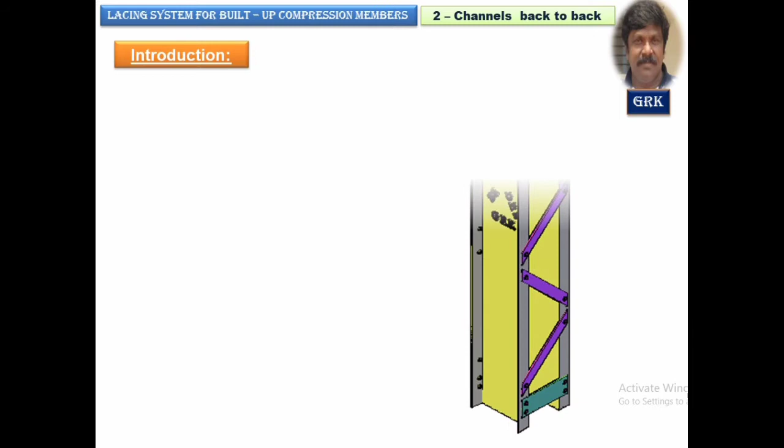Already in the previous video you have seen the design of two I sections joined together by a single lacing system. Now in this session let us study about how to design the single lacing system for the channels placed back to back as shown here.

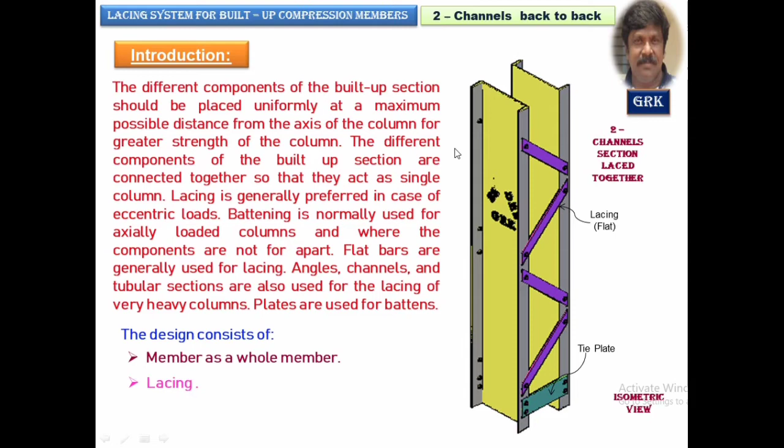The lacing systems will be generally provided for eccentric loading system, whereas the battens will be provided for the axially loaded columns. Now in this session let us try to understand and design the different components like the members, this built up members as a whole, the lacing flats and the joints.

Here the joints have been designed with bolts of different grades. In the next video let us try to learn the same two channels placed back to back with the welding system for the same single lace system. Let us go with the welding. Let us study that in the next coming video.

Now in this section we are going to design the lacings in the form of flats. In the coming sessions or videos you can observe how to design the angles and channels as a lacing system. Let us learn that in the forthcoming videos.

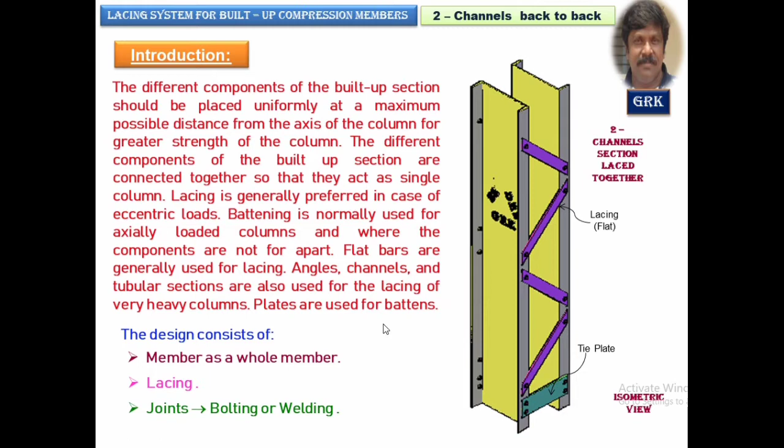Let me take a typical example to design the channels placed back to back. We can also learn about channels face to face or toe to toe. Channels face to face can also be called as channels toe to toe.

Now in this problem we have got two channels placed back to back to carry a factored load of 1300 kilonewton, which has got an actual height of 7 meters and has been effectively held in position at both the ends but not restrained against rotation. The meaning of this is it is hinged at both the ends.

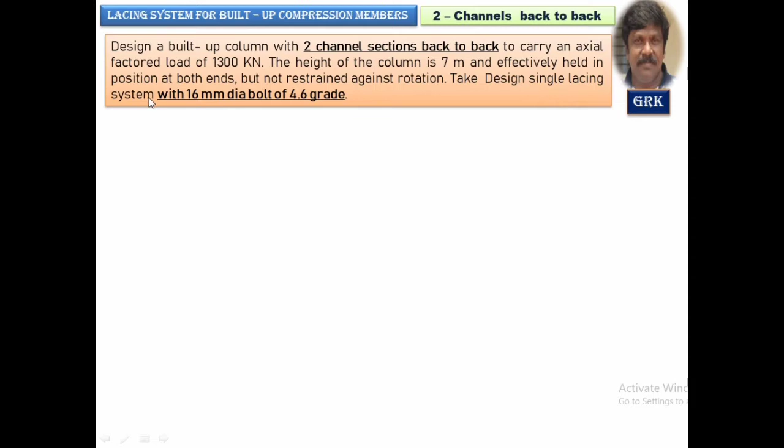Let us try to take out the effective length formula from the code and learn about that. And we have to go with a single lacing system with a 16 mm dia 4.6 grade bolts.

So let me take the I section. I just place it like this back to back. We want to find out the suitable spacing for this, and all the spacing, everything will be designed based on the condition that we have to design with an economical section that can be obtained only when I take up the RZZ value which is running perpendicular to this web and parallel to the flats lacing.

That one should have a minimum radius of gyration or less radius of gyration than about YY axis. That is what the code specifies. We have to purely stick on to that and see how to design.

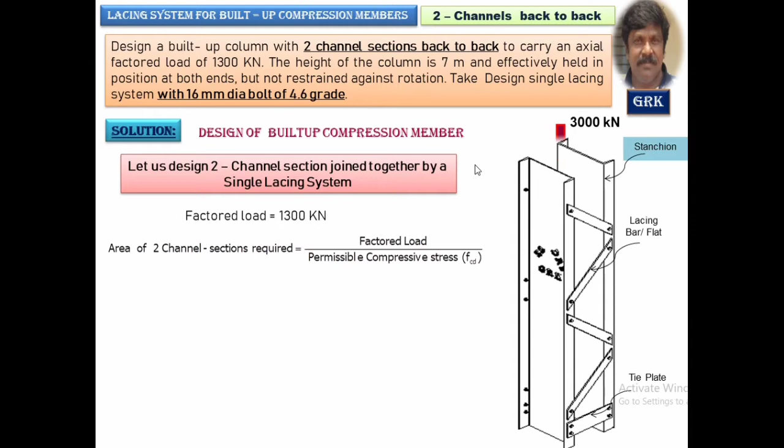I will speak about all these things in a separate video where the complete procedures we are going to talk about for the different conditions. You can look into that video and learn more about the theoretical aspects of these problems, how to solve the problems.

Now you got the area of the two channels that is required to be found out by using the formula factored load divided by permissible compressive stress. The compressive stress could be assumed between 125 Newton per millimeter square to 200 Newton per millimeter square, approximate range.

From 0.4 times of Fy to 0.7 or 0.8 times of Fy value. The lambda value you can assume like that and get the stress, or assume the stress itself and solve the problem. I can assume anything between this and try to solve the problem.

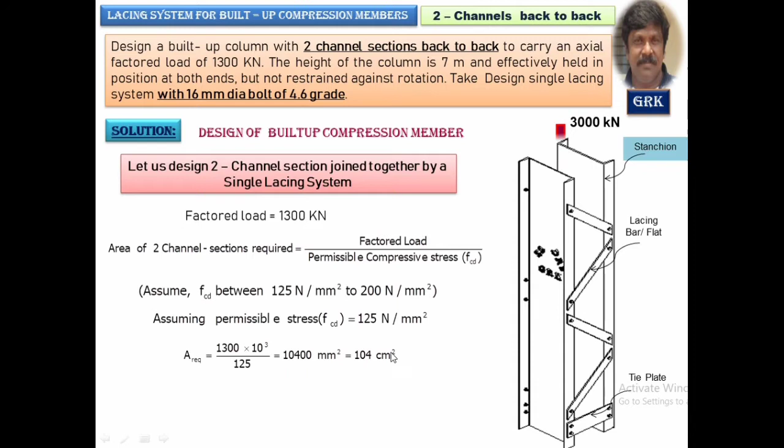Now in this case I have taken the permissible stress as 125 Newton per millimeter square. The area required is 104 centimeter square, and we will read in terms of centimeter square because in the code IS SP 6 part 1 or referring the steel table we have to look into the centimeter square. So we are going to convert the millimeter square to centimeter square. So the condition lies here for the lacing.

As I explained earlier, the maximum radius of gyration RYY should be greater than RZZ. RZZ is nothing but the axis which passes parallel to the lacing system. So this is the layer the lacing has been done to the flanges of the channel. Now this is the ZZ axis parallel to that. That means RZZ should be less than RYY, should be less than or equal, you can say.

And the moment of inertia about ZZ axis and YY axis should be approximately equal. That is another condition to be satisfied, and based on that we are going to find out the spacing between these from the steel table itself or from the code book.

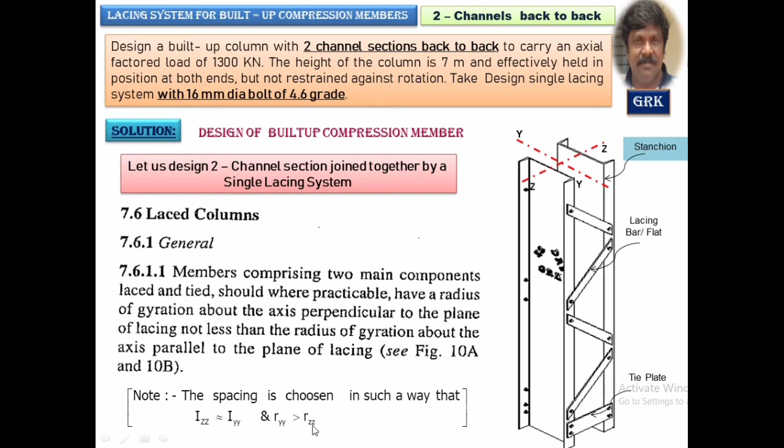It has to be chosen from the steel table based on this condition: IZZ should be less than or equal to, nearly equal to IYY, and RYY greater than RZZ. That is how you have to select from the table.

Now we will take out the table mentioned in the steel table, where the two channels are joined together either by lacing system or by batten system. For the area that was required, we refer approximately 15 to 20% more, and the area I am going to refer is 107.32 centimeters square.

Now I am going to look into the spacing in such a way that the moment of inertia about ZZ axis is approximately equal to moment of inertia about YY axis. These values are approximately equal, and at the same time the radius of gyration about ZZ should be less than the radius of gyration about YY axis. This is how we are going to select the member.

So the selection of the member is ISMC 350, and the spacing for this is correspondingly equal to 220 mm. The distance between the channels back to back, or from web to web, we can call it 220 mm. We can try this, or otherwise there is another way of calculating it.

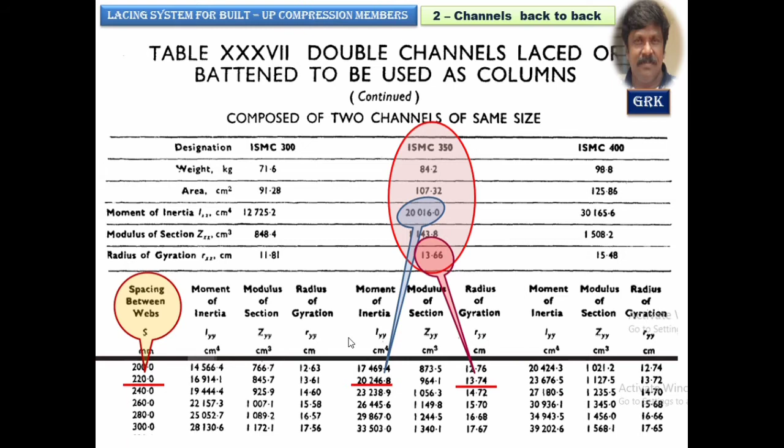We can calculate from the knowledge we got in the first semester of engineering, from the moment of inertia chapter. We can do it like that, or get it from the table itself directly. Any method could be adopted for selection of the section.

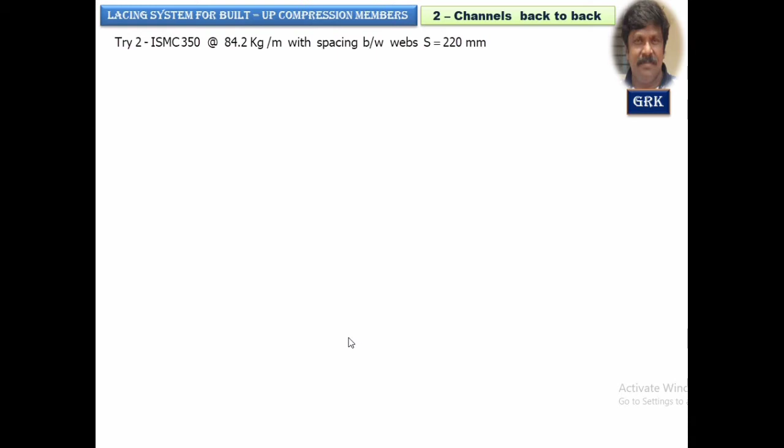Now we are going to try this section of ISMC 350 at 220 mm center to center. Let us write down the section properties whatever we have got. The area we have taken, the RZZ value I have noted from the table we referred. I could have written the value of IZZ and IYY, but since we are not using them anywhere, I have not written it here. If you want, you can write that also.

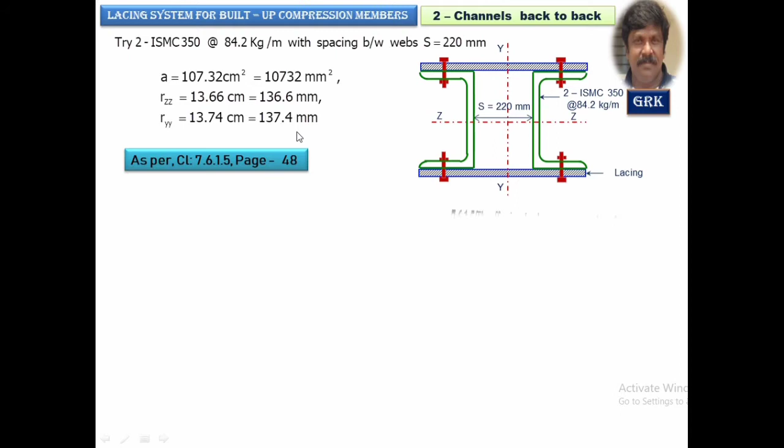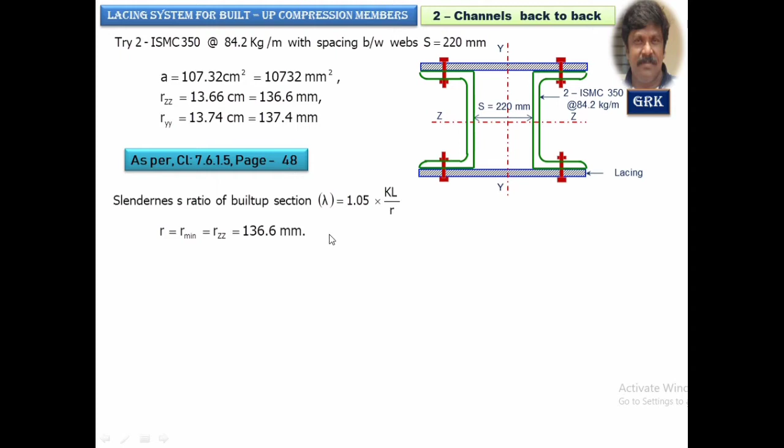Now as per page 48 of the code IS 800, the slenderness ratio has to be taken from clause 7.6.1.5 as 1.05 times KL by R minimum. So R minimum is the minimum value of RZZ, and KL is the effective length.

Effective length can be obtained from table 11 of the IS code 800 2007, where the condition given is that both ends are restrained and free at the other for rotation, meaning it is hinged at both ends. For the hinge condition, the effective length is taken as 1 times the actual length.

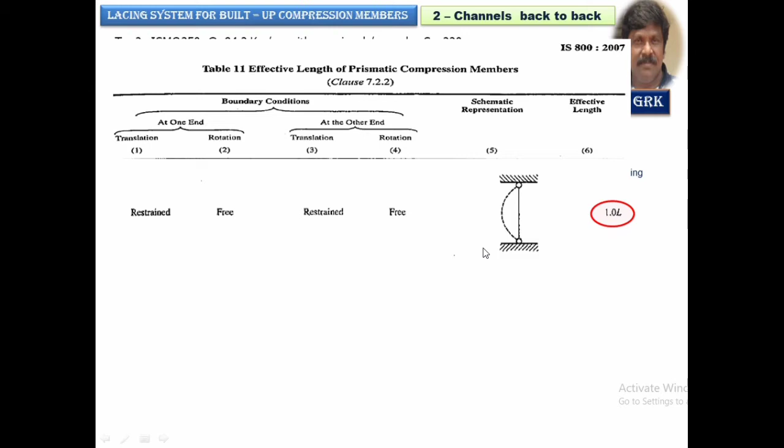So whatever the actual length given, that is 7 meters, the same 7 meters will be taken as the effective length. This is how we can write it: both ends are hinged.

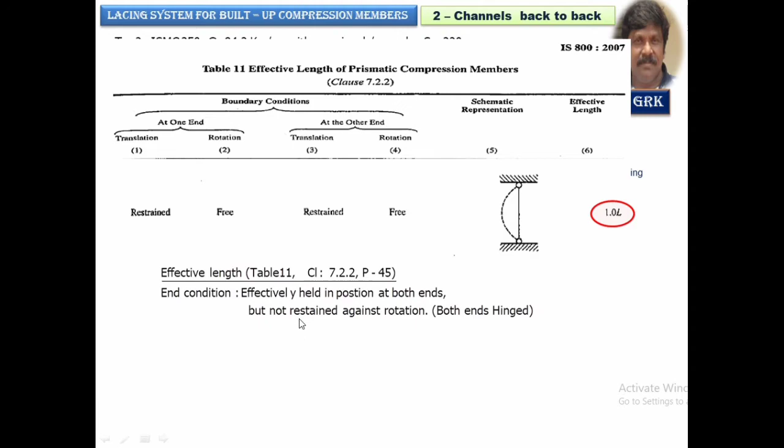Now I got the effective length. Get the slenderness ratio lambda of the built up section. The lambda of the built up section is 53.81 with respect to the ZZ axis.

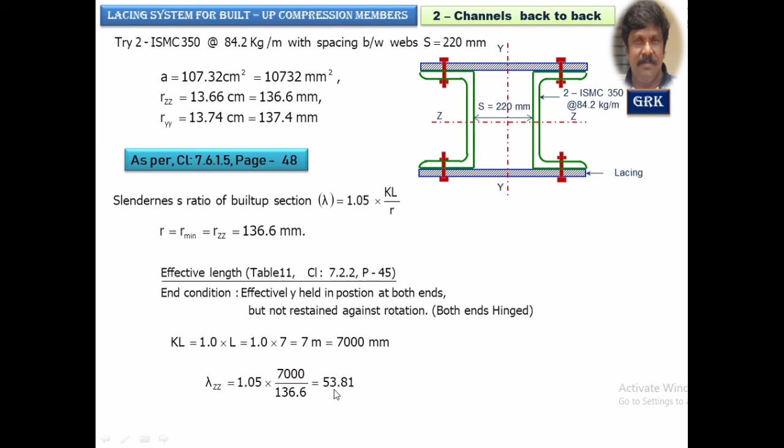So for this lambda value, you have to get the compressive stress from the table, and from page 44 table 10 we can get the buckling class of the built up section.

For any built up member, here only I sections have been shown, doesn't mean that all sections should be given, we have to look into this built up member. So built up members of any type, channels either back to back or face to face, or with I sections or angle sections, you are going to look into buckling class C.

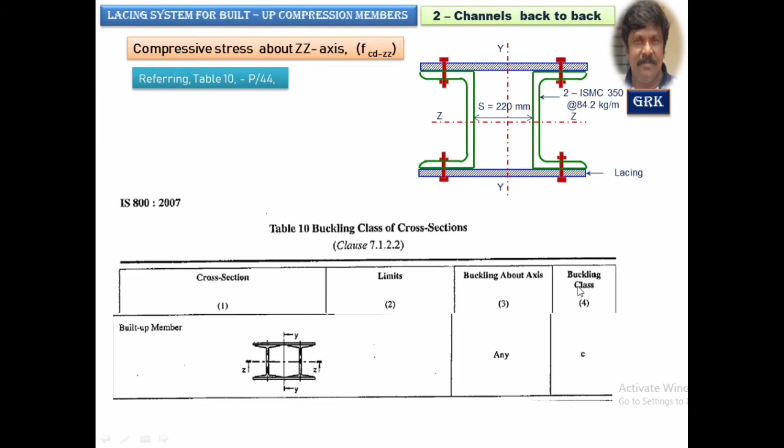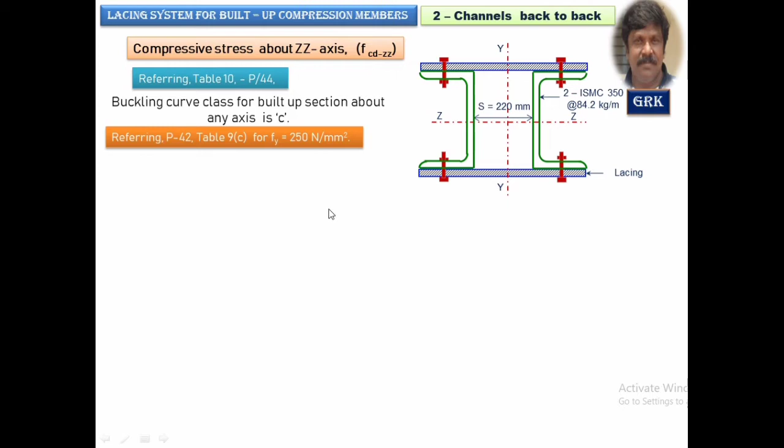So the compressive stress you are going to refer is from page number 42 of the code, where it's given for buckling class C. From table 9(c) you can get the value of FCD. Let us have a look at the table.

This is an extract I have taken from the IS 800 code. Now we got around 53 point something as the lambda value. It lies between 50 and 60 here. KL by R is nothing but the lambda value, lambda ZZ. This is the FCD value. We are going to refer it for yield stress of 250 Newton per millimeter square.

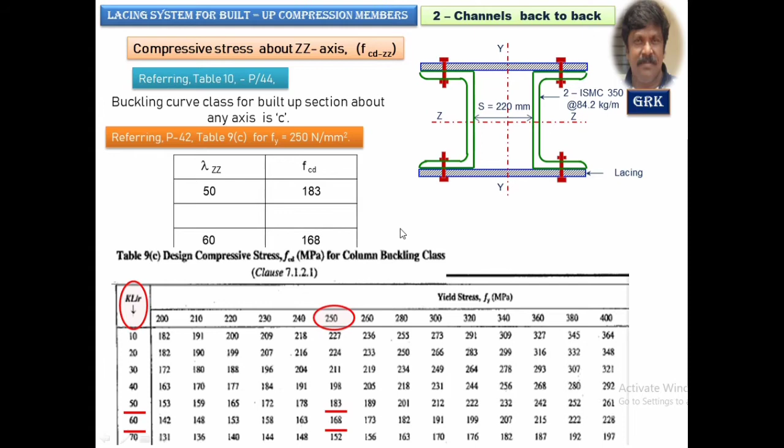For 50 it is 183, for 60 it is 168. You are going to enter that, now try to get the value by interpolation. The difference of this and this is 10. The value for 50 is 183 and for 60 is 168, the difference is 15. For 53.81, what is the FCD value? It should be less than 183 and greater than 168. Let us get it by interpolation. It works out to be 177.03 Newton per millimeter square.

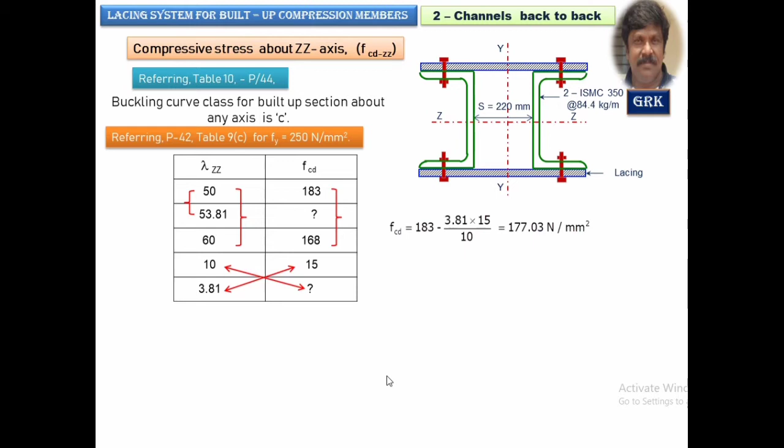From the strength of stress and strain concept, we know that strength of any material is equal to stress into area of that material. So the load carrying capacity of this section you can find out by multiplying the compressive stress, whatever you got for these members, into the area of those two members. It works out to be 1902.8 kilonewton, which is greater than 1300 kilonewton.

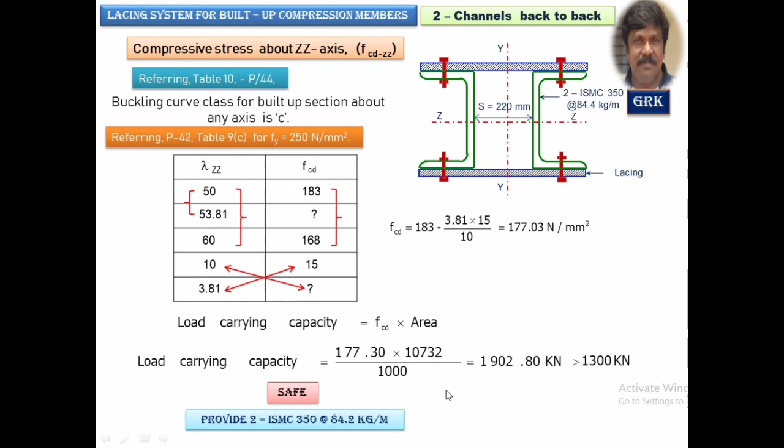It is safe, but maybe uneconomical. So when you are designing, keep in mind that this value should be either 5 to 10% greater than the required value, so that it gives an economical section, otherwise the cost will be more. Therefore, you can redesign it, but anyway I have gone with the procedure of solving the problem. Once you start designing for lifetime or field conditions, see that this value is very close to the required value and greater by only 5 to 10%, so you can choose a section with a lesser stress and area that comes to 1300 kilonewton. Once the section we have designed is safe, we can provide that. As I said, it is uneconomical, but still no problem from the procedure point of view for the examination.

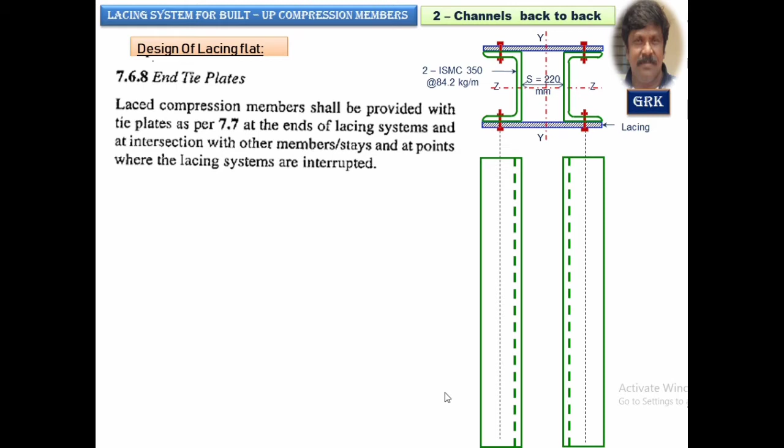Now let us design the flats here, the lacing flat. As per the code specifications, clause 7.6.8, you have to design the end plates. This is the end plate to be designed. I will design this plate's length, depth and thickness in the last part of this session. In my earlier video I have not designed that; now I am designing it. You can have a look at this, you can learn it if you are interested, you will solve it in the exam from the examination point of view, or else no problem, but it is very much necessary from the life point of view.

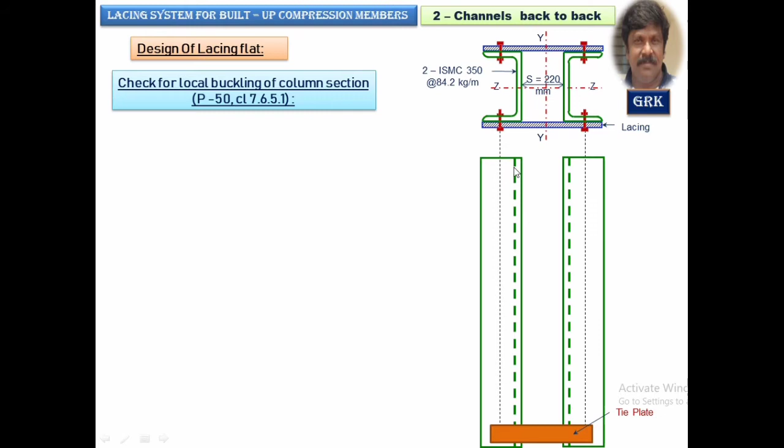Check for local buckling of the section. According to clause 7.6.5.1, page number 50, we have to design this in such a way that when these columns are placed and loaded, it should not buckle like this. There should not be any bend in the lateral direction; it should not bend. Therefore, to keep them in position, we are going with lacing flats or battens, so that these columns are kept in position. We don't want any buckling of the column to take place.

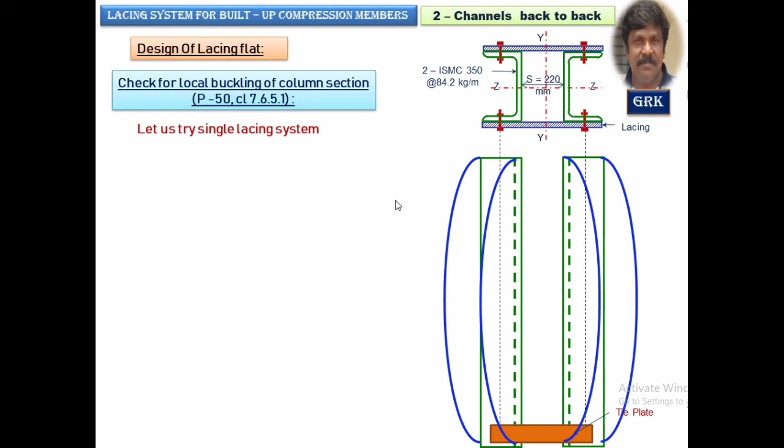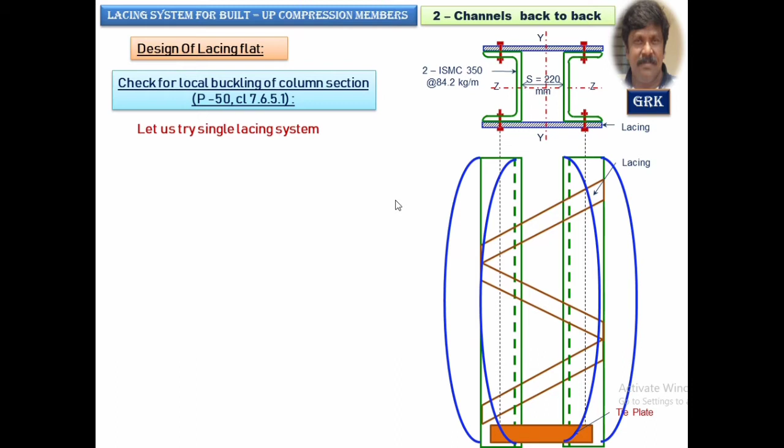So by providing suitable flats, let us make a check whether due to what we provide, this column is going to buckle or not. That can be done by providing the lacing. I am going with a single lacing system here as per the question. In the coming videos, we can have a look at the double lacing system, the welded design of weldings and other things.

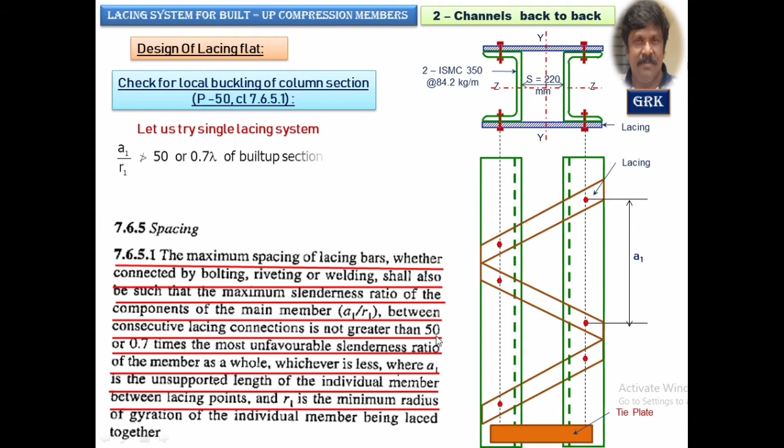According to clause 7.6.5 of the code, the maximum spacing, that is the distance between these two bolts, called A1, divided by R1, the minimum radius of gyration of a single channel section, shall be less than 50 or 0.7 times the slenderness ratio of the unfavorable slenderness ratio of the whole member. That means whatever lambda you calculated earlier, 53.81, should be multiplied by 0.7, and see that value is not greater than A1 by R1.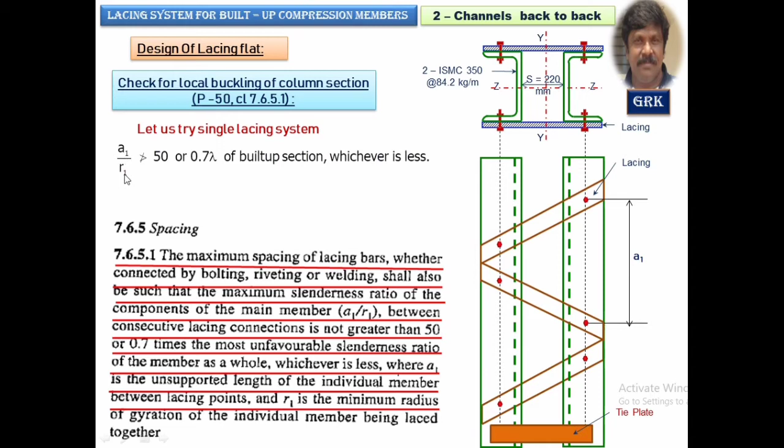So now let us get the A1 value. If you observe this figure, in my earlier video where the two I-sections were joined together, we had overlapped the lacings. There was only one bolt on one side, this was overlapped, so we had double shear when we were calculating the number of bolts in shear.

But in this case I have changed it a little bit, we are placing it side by side. The problem with this is it will be costly, as you have to make additional holes here and go with additional bolts. Anyway, from the practice point of view I am going to teach you this. Let us try to understand this and the approximations we are going to make for this type of connection, only from the academic point of view, to learn the subject I have just changed this.

Now let us take the angle of inclination for this one, where the lacing bars should lie between 40 degree and 70 degree. The angle of inclination is what it is going to make with respect to the longitudinal axis, shall be between 40 degree and 70 degree. This has been designed based on the economical design condition that this should not be too slender or too flat.

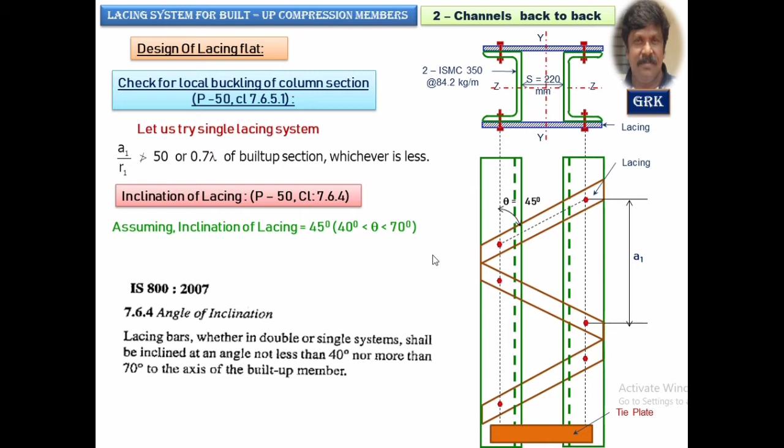I will speak about all these things in a separate video when I am going to talk about the design procedures of the different components as well as the lacing system and the bolted connection in particular. Now we are going to assume an angle of 45 degree.

So for this, from the steel table with a single channel section, we can get the value of the gauge length. The distance from here to the bolting position is called the gauge length, that you can observe here.

This is important to get the length between the bolts, the horizontal length. So refer here for ISMC 350, the G value has been given as 60. So let us adopt the 60 mm distance to get the horizontal length between the bolts.

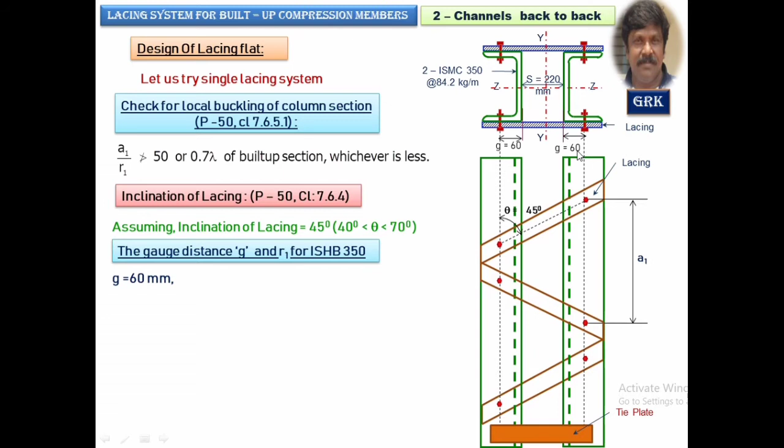You have plotted here. Now get the minimum radius of gyration, that is R1, required for the single channel section. Referring to the single channel section of the steel table, the radius of gyration about ZZ axis and Y axis. Every time I am reading XX as ZZ, remember it.

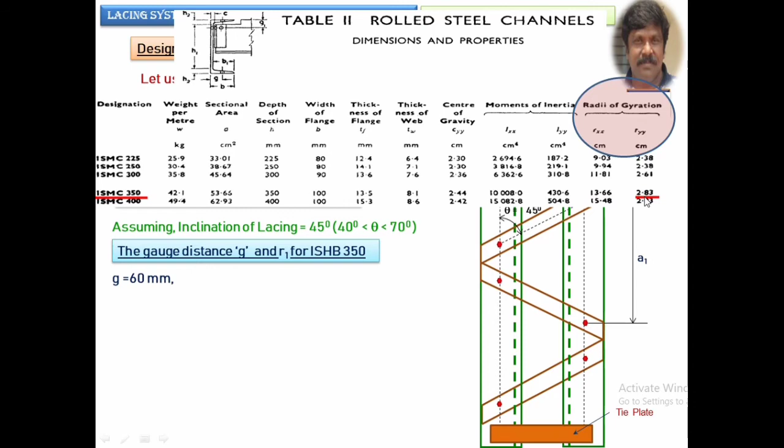So for ISMC 350, you got two values, 13.66 and 2.83. Out of these two, 2.83 centimeter is the lesser value. Therefore, R1 is taken as 2.83, that is 28.3 mm.

So once you know this, get me the value of A1. Let us see the approximations that we are going to make. The horizontal distance is this LH.

And we know the spacing between the channel webs, it is 60 plus 220 plus 60, which will get me the LH value. Works out to be 340 mm.

Now we know that tan theta is opposite side by adjacent side. This is the tan theta, opposite is this one, adjacent is this value. So if I get this height, then I can easily get A1.

So that is nothing but LH by LV, opposite by adjacent side, and LV is 340 mm, same, because if you have taken 45 degree it remains same. If you have taken any other degree you would have got a different value. So from here to here it is LV, the same way it is also from here to this bolt is LV. There is a gap here.

This you can assume equal to the width of the flats that we are going to assume, maybe around 50 or 60 mm we can take, and we can add up to get the value of A1: LV plus the sum, 60 mm plus LV, will get me A1. Or you approximate this as A1 equal to 2 times LV and neglect this part. I can do that, no problem, because none of the books have given very clear guidance about this.

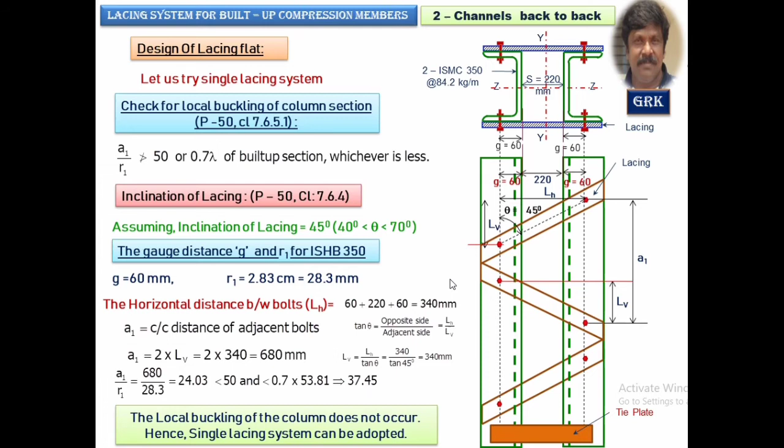So therefore, you can provide this single lacing system. I can adopt it. Now let us go and design the flats here.

Now in this session I will be talking with respect to the flats. In the coming videos let us learn how to design with angles or channels, I-sections or tubular sections. Anything could be designed. We will see that in the forthcoming videos.

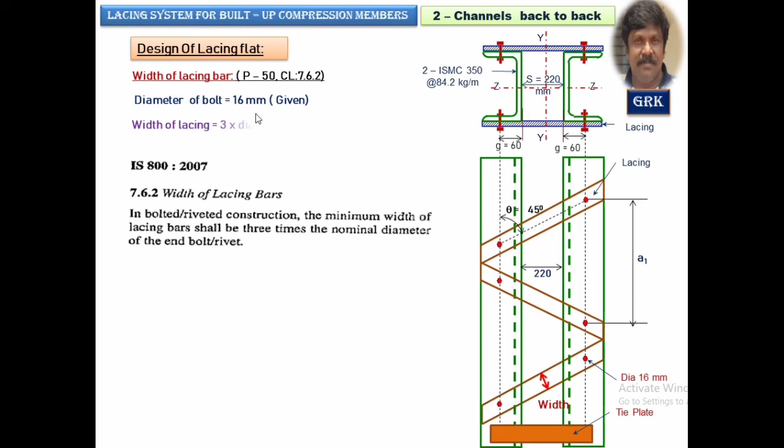According to clause 7.6.2, the width of the flat shall not be less than 3 times the nominal diameter. Nominal diameter has been given by the examiner in the question paper as 16. Therefore, 3 times 16 is 48 mm. Say the width be equal to 50 mm.

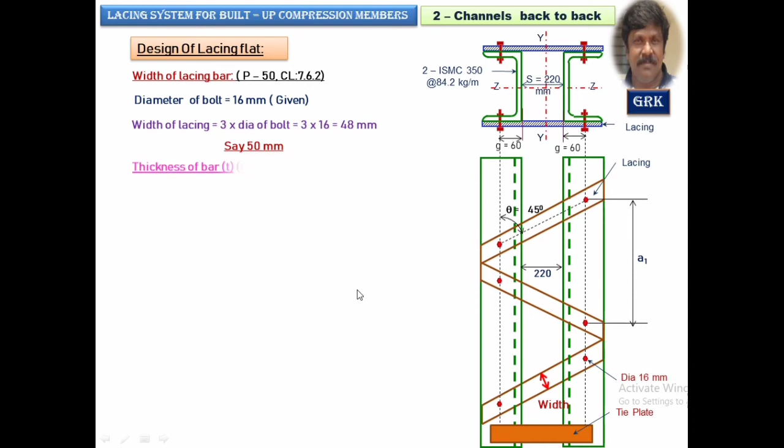Thickness of the flat also has to be taken. According to clause 7.6.3 as given in page 50 of the code, for the single lacing system, it shall not be less than 1/40th the effective length of this lacing. That means you have to calculate the length along this direction, the distance from inner to inner bolt.

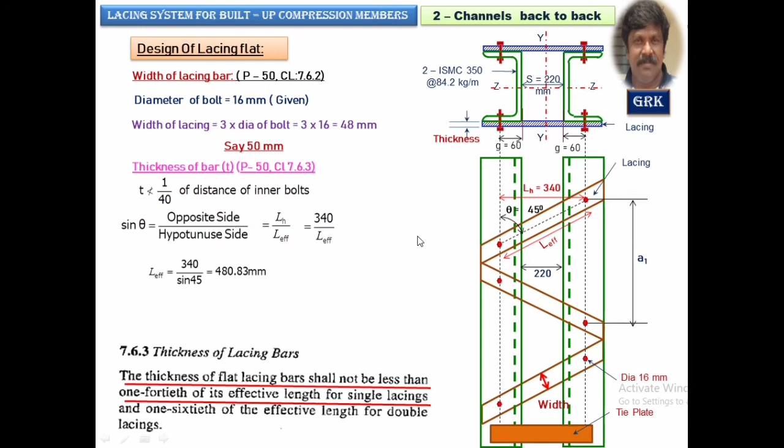So we know that sin theta is opposite side by hypotenuse. Opposite side is LH, hypotenuse is this one, that is L effective. I am going to designate this as L effective. From this you can get the value of L effective. It's 480.83 mm, using simple trigonometrical ratios.

Substituting in the formula we got this as say 12.02, and if you refer the code book or the steel table, you don't have the exact nearing number, you get a 12 mm thick flat or the next number, 16. Therefore, I am going to try a flat of 50 by 16 mm thickness. As given in the steel table, I am going with 50 ISF 16 — 50 is the width of the flat, ISF is Indian Standard Flats, of 16 mm thickness. This is a flat which is 50 by 16, I can name it here also.

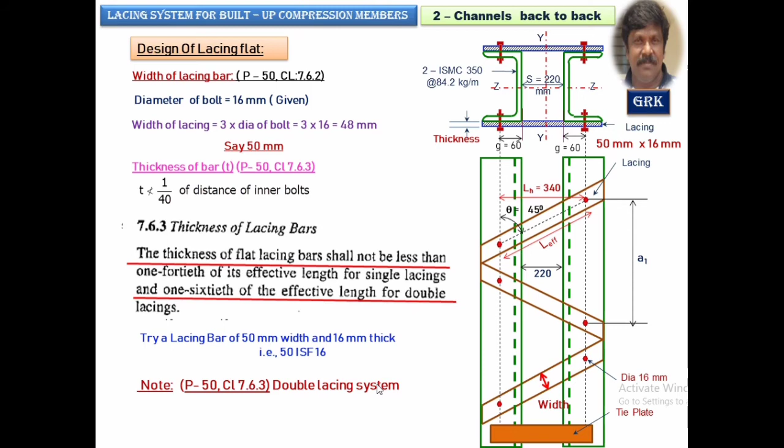For the double lacing system, as stated in clause 7.6.3, it shall not be less than 1/60th of the effective length between the bolts. We will see that in the coming videos.

Now whatever flat you have designed, it should withstand and see that the slenderness ratio doesn't exceed the limit as per clause 7.6.6.3, where it states that the slenderness ratio lambda shall not be greater than 145. If it is a welding system, we can go with 0.7 times of that length, and if it is double lacing, 0.7 times of the effective length.

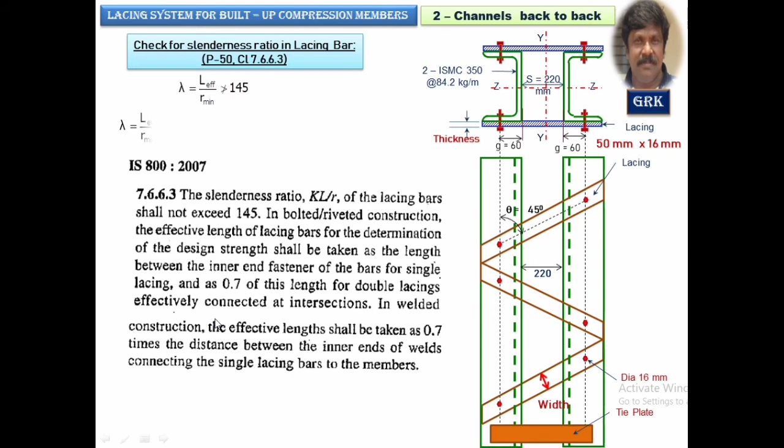Now let us calculate the minimum radius of gyration, R minimum, for this flat. Using the radius of gyration formula, it is equal to T by root of 12. So L effective is divided by T by root of 12, meaning lambda is equal to L effective into root 12 by T. You can directly remember this formula, or it could be derived — no problem. So lambda is equal to 104.10.

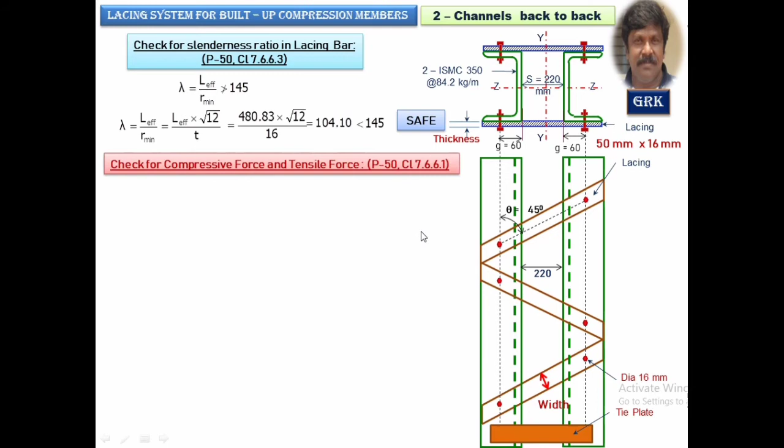So whatever lambda you calculated, for this you find out the stress from the steel table. These flats will be subjected to both the compressive force and the tensile force. Since lambda is less than 145, it is safe, there is no problem. To make a check, a similar check is done with respect to compressive and tensile force. So how to calculate the force in the lacing bar?

This is the tensile stress, this is the compressive stress, the force developed in the flat. I can speak with respect to the force rather than stresses. So for this we have to make a check. The force in the flat has to be calculated with respect to the transverse force that will be calculated from the longitudinal loading. The load will be acting along the axis of the member.

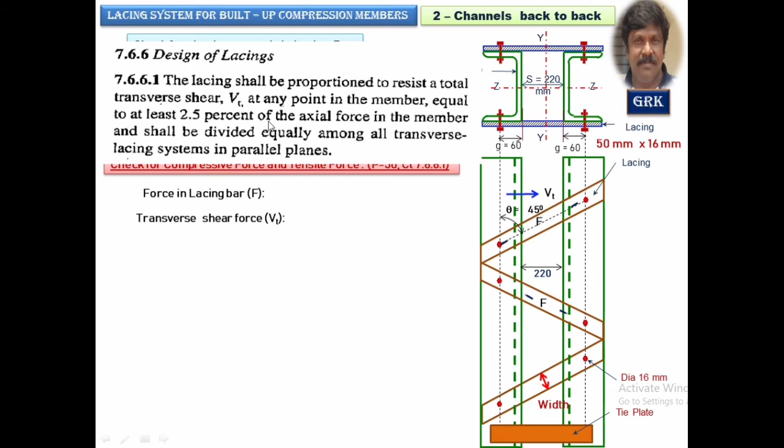You are going to find out the transverse force Vt, which is equal to 2.5% of the axial force of the member. The factored axial force is 1300. Take 2.5% of that, and that is equal to 32.5 kilonewton, which is the Vt value.

Resolve this force along the axis, along the flat, and get the value of F. So sin theta is equal to opposite side by hypotenuse, which is equal to Vt by N into F, where N is the number of shear planes. Shearing will take place here, shearing will take place here. We have to divide this and distribute it on either side. All these flats will be placed with mirror image, so it will be distributed in two planes. Therefore, the force on each side has to be calculated.

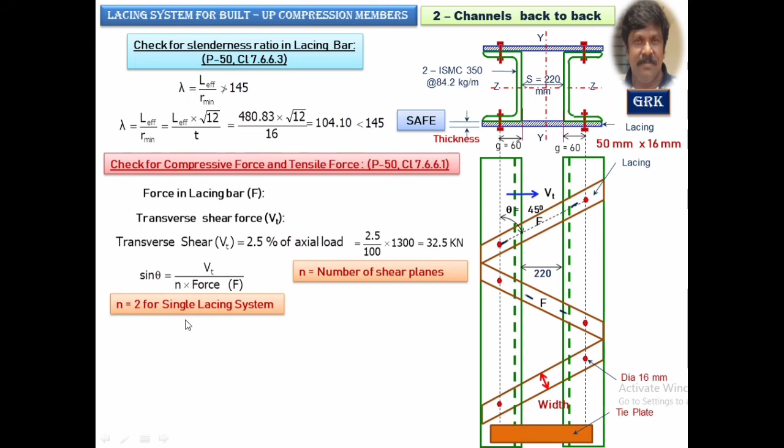For the single lacing system, you have one shear plane here, another shear plane there. Therefore, the value of N could be taken equal to 2 for single lacing, and equal to 4 for double lacing system.

In this formula, the value of F is equal to Vt by N into sin theta, that is in the denominator position. Get the value of force in the member, and that is equal to 22.98 kilonewton. This is the force in the flat.

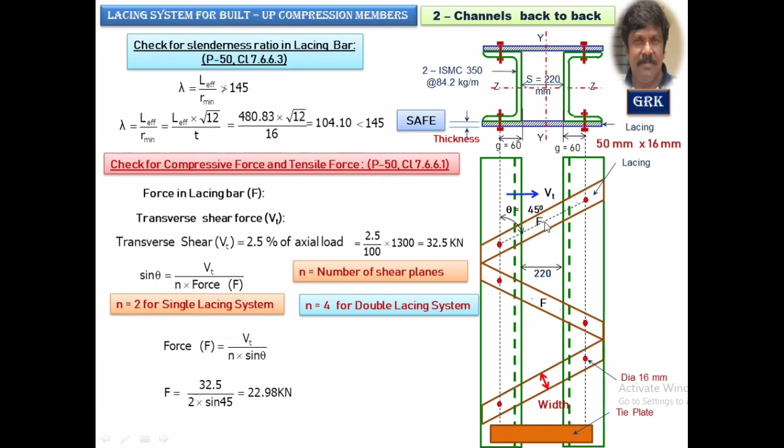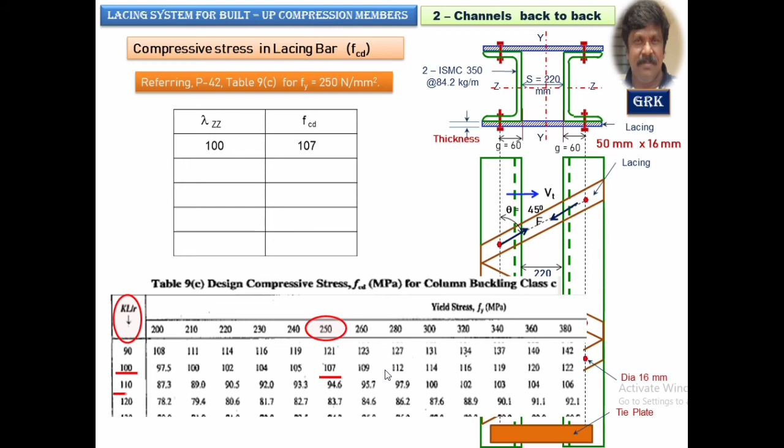Let us find out from this force the compressive stress and the tensile stress. Compressive stress from table 9C, page 42. You can get the value of compressive stress for that lambda value, which lies between 100 and 110. So for 100 it is 107, for 110 it is 94.6.

By interpolation, get the value for 104.1 lambda value. Cross multiply, get the value of that question mark, and that value will be deducted from 107, because it is going in decreasing order. As the lambda increases, the stress decreases. Therefore we are going to minus it here with respect to 107. It's 101.92 Newton per millimeter square, the compressive stress developed in the flat.

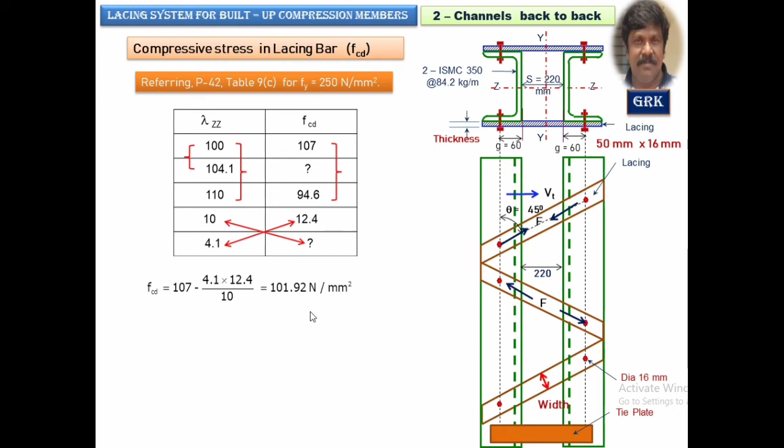We have to find out the force in the member, and that should be greater than the F value we have calculated. Yes, it is greater than the F value we have calculated. Therefore it withstands the compressive force. Now it is safe with respect to the compressive force.

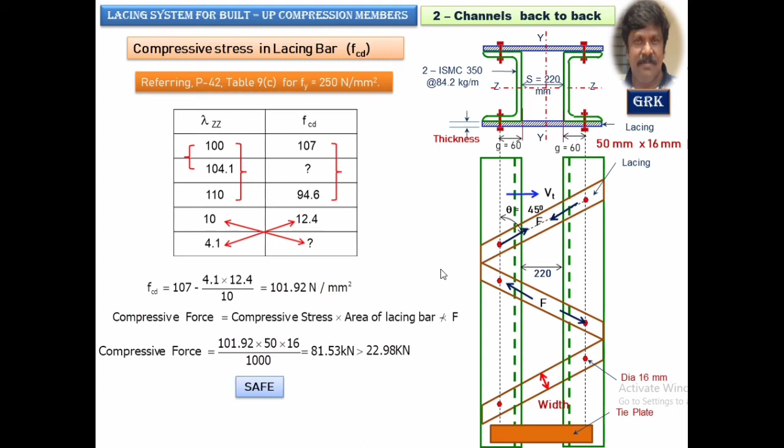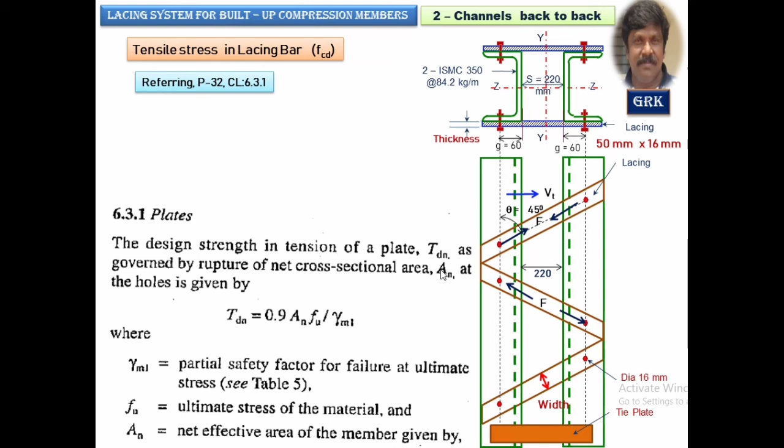Let us calculate similarly with respect to tensile force, where the tensile force will be calculated according to the code clause 6.3.1, page number 32, which states that the tensile strength is 0.9 times A1, AN into Fu by gamma m1, where AN is the net effective area, and we know how to calculate the net effective area.

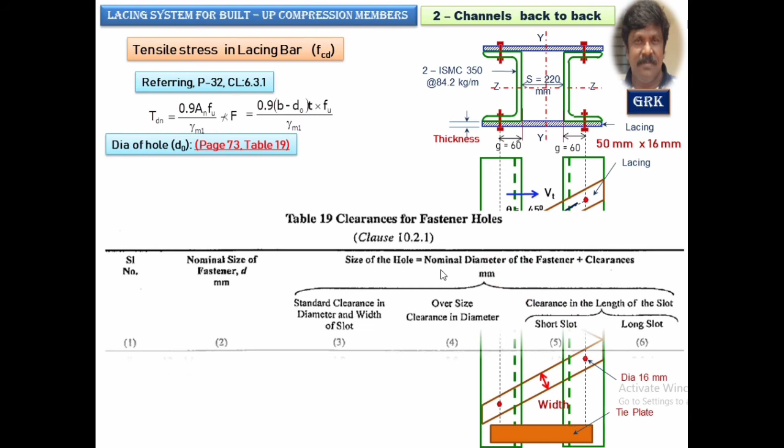It is B, which is the breadth of the flat, minus D naught, where D naught is the diameter of the hole, given in table 19 of the code, where you refer to the standard clearance cases. For the diameter of the bolt being 16, in our case it lies for 16 to 22 mm, we have got a clearance of 2 mm to be added to get the opening size of the hole.

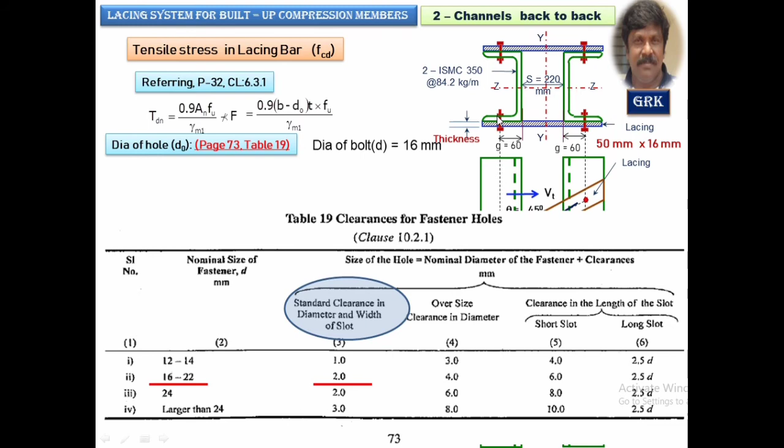The hole is to be made in the flat as well as in the flange of the section, where we want to make the hole here. This value has to be added with 2 mm extra, and it works out to be 18 mm. Now get the value of the tensile force. It is 151.14 kilonewton, which is greater than the F value.

Safe. It is safe with respect to the slenderness ratio. It is safe with respect to the compressive force. It is safe with respect to the tensile force. Therefore you can provide a flat of 50 by 16 mm. Earlier we had tried it, now we are providing it. The size of the flat is 50 ISF 16.

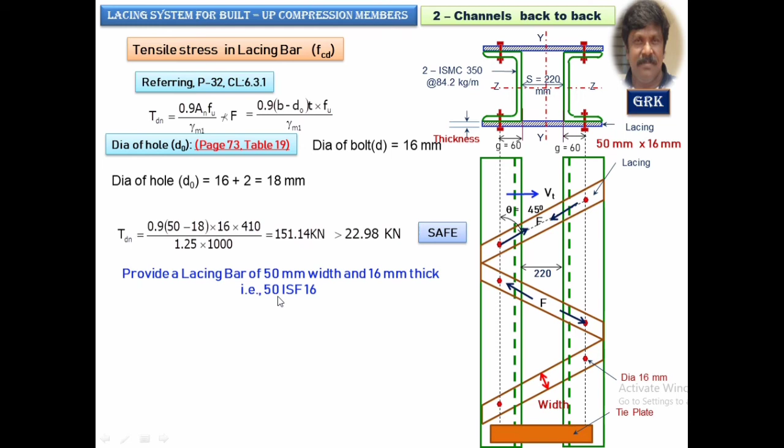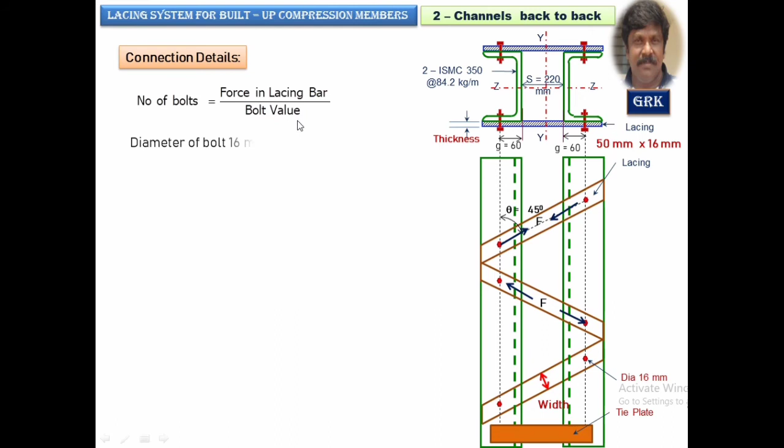Now comes the connection details, the last part, designing the joints. In this case we are going with bolted connection with 16 mm dia bolts. The number of bolts required on one side of the joint is given by force in the lacing bar by bolt value. They have the bolt 16, and we also know how to calculate this.

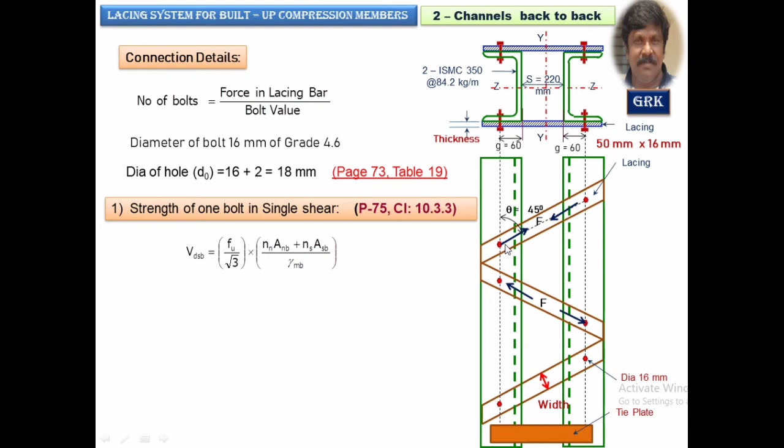Whenever it is placed separately like this, it is a single shear, whereas in the previous video this was overlapped, therefore it was subjected to double shear. According to clause, whatever formula was there, that has to be multiplied by 2. Now this is a case of single shear, previous video it was double shear. This difference, if you note down, there is no problem.

We'll assume that the thread is interfering with the shear plane. Here the thread is interfering, therefore we'll take the value of n as equal to 1, and there is no value for the shank portion, it's 0. Gamma MB from the table is 1.25, and ANB, area of the threaded portion, is 0.78 times pi d square by 4. For the shank portion it is pi d square by 4, as you observed in the previous video, and all these things you have studied in the bolted connection in the second module.

The VDSB value, the strength of one bolt in single shear, is equal to 28.97 kilonewton.

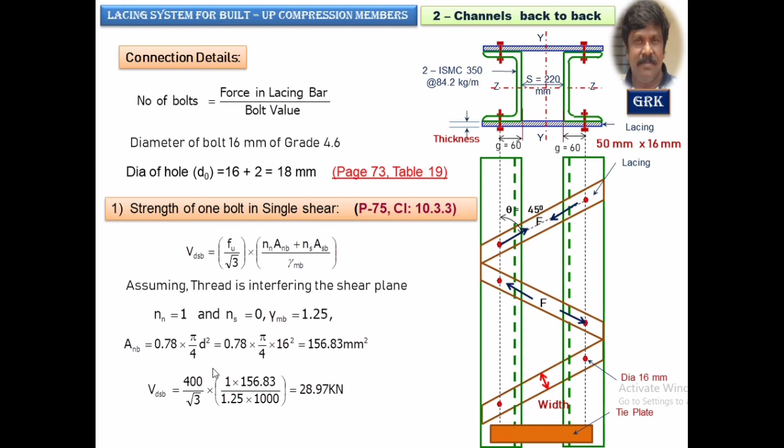Next, you calculate the strength of the bolt in bearing, which is given in page 75, clause 10.3.4, where VDPB is equal to 2.5 into KB into D into T star Fu by gamma MB. T star is nothing but the minimum thickness of these two, that is the flat as well as the thickness of the flange. The minimum has to be taken here.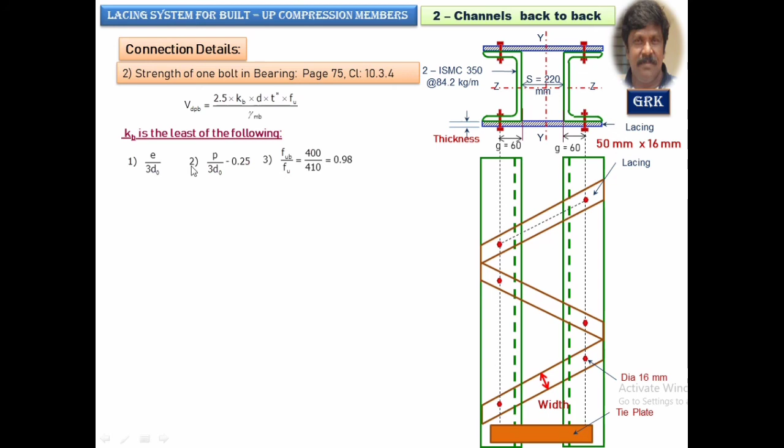In the previous video, we had taken the values and calculated E, P, E neglected as not applicable, so we just neglected it and found out the values. Now in this case, to be on the conservative side, I am going to assume the value of 1 here to be on the safer side.

The thickness of the flange of the section is 13.5, and thickness of the lacing bar what we designed was 16 mm. The minimum is 13.5. Make use of that in the formula. T star, KB, we have taken as 1 on the concept of conservative side, and got the value of 172.8 kiloNewton.

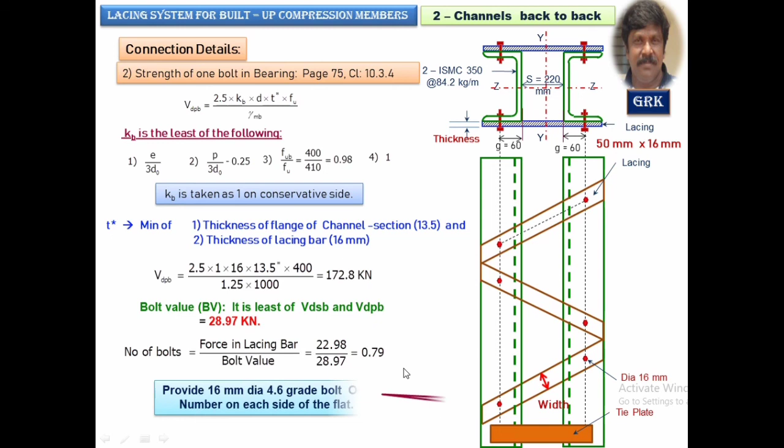The bolt value will always be the least of VDSB and VDPB, strength of the bolt in shear and strength of the bolt in bearing, for one bolt. It's 28.97 kilonewton. Find out the number of bolts: that's equal to 22.98, the force in the lacing bar, divided by 28.97, which gives 0.79. Provide a minimum of one bolt on each side, of diameter 16 mm, grade 4.6.

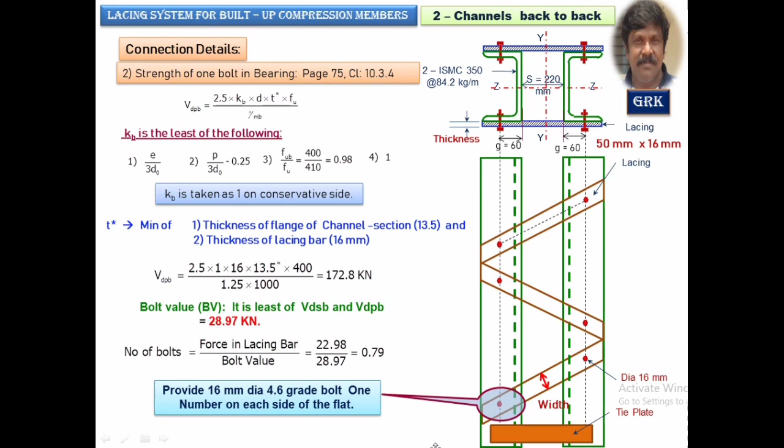So in the previous video we had stopped at this stage, but in this problem I am going to teach you how to design the tie plate. This tie plate will be designed the same way as we are going to do for the batten section. As far as possible it has been simplified here, to try to make simple calculations.

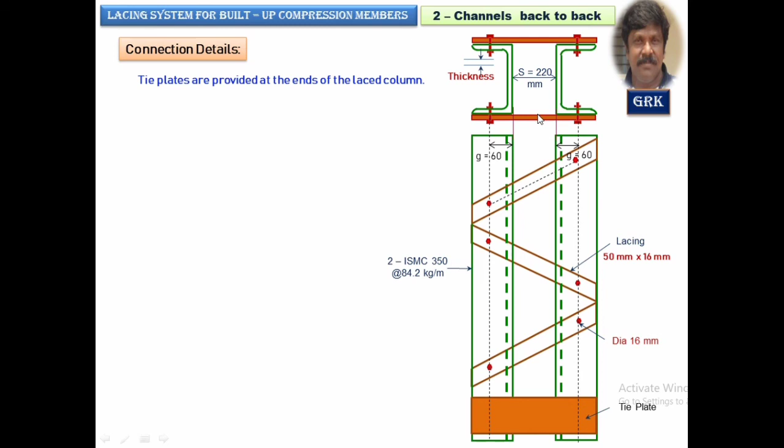Now let us find out the width of this one, which is very simple to calculate. It is nothing but equal to the spacing between the webs of the channel section plus the width of the flanges, which you can note down from the steel table, and it is 100 mm there. You can get the total width.

Find out the depth of this one and the thickness. The effective depth of the tie plate will be calculated based on the number of bolts that we are going to provide. It is equal to back-to-back spacing of the channel plus 2 times the CYY value, which you get from the steel table, and this works out to 24.4 mm, the CYY value for this section. So 268.8 mm is the effective depth.

That will be the distance between the two bolts; I'll show you that later. The overall depth is equal to 2 times this distance between the bolts plus the minimum edge distance you are going to give, 2 times edge distance, and the minimum edge distance is equal to 1.5 times the D naught value, that's 30. Add up and get the overall depth of the section.

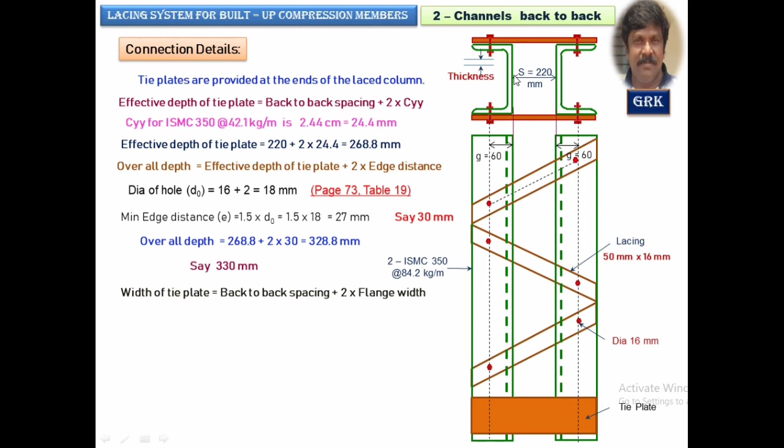It's 330 mm. Overall depth is 330. Width is very simple: it's the back-to-back width of the flange plus 2 times the width of the flanges, back-to-back distance between the webs of the channel section. It's 220 plus 2 times 100, which is 420. Thickness is given by the formula 1 by 50 times the back-to-back distance plus 2 times the G value from here to here, divided by 50, giving the thickness of the tie plate as 8 mm.

So we are going to provide a tie plate of size 420 by 330 by 8 mm thickness. Nominally you provide 2 bolts here, 2 bolts here, so go with 4 number of bolts for the connection.

Hope you understood the design of the lacing system for the 2 channels placed back to back with the bolted system. This is a bolted system. In the coming video we will go with the welded section. We can take the same problem; I can change the section, or I can design the same section with welding for the lacing system.